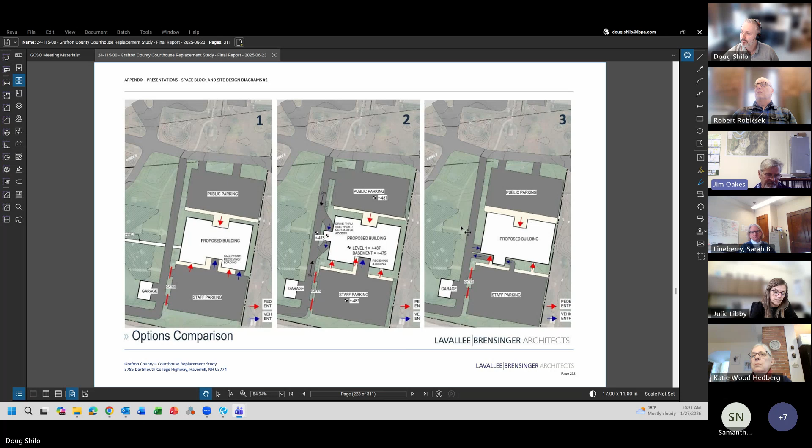Like a set of binoculars tuning in on what I think we need to do at this point is go back to where we were looking at the Sally port underneath, find out through the reductions that have come out in this latest round, see if maybe it's a wash on putting that back under. Hopefully it would be, and hopefully it'll just be the 3 to 4 deputies we're gonna have to hire long-term versus more bailiffs, which seem to be pretty tough to get.

Thoughts? Can I just say, I don't think that a tunnel or any kind of connection should even be a consideration. I just think given how much was spent on the J connector, which is just a hallway that doesn't run a very far span, the price for a tunnel would be kind of ridiculous.

So I think if you guys are able to figure out a way to put everything in the basement and just have the courts on the first floor, that would be the most ideal setup. Yeah, that's what we're talking about. So Bob's point was, okay, if we do all this exercise, most likely there's a possibility that the building cost might grow, but you might have enough offsets to where maybe the cost won't.

But he's also saying that when you go out and talk to the public, they're gonna have to understand that, because of these changes and the need for deputies long-term, you've just got to be able to explain the rationale for what we're following.

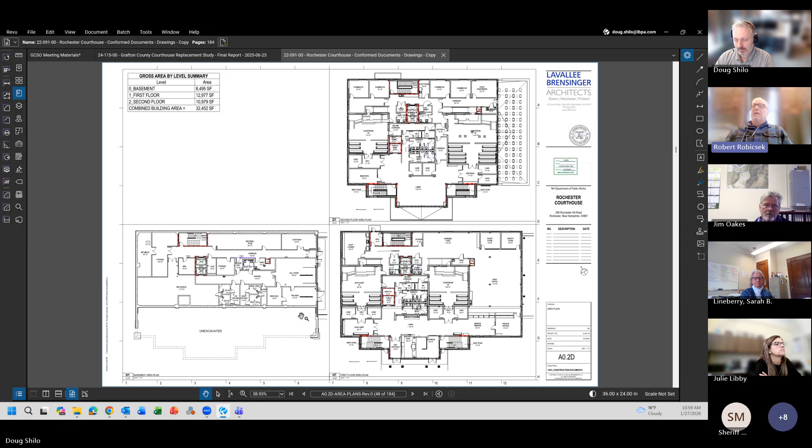So if this is the basement in that building, the Sallyport, they come in here, and then there's a control room with some holding cells and an elevator that leads up to the secure corridor. So this elevator right here leads to the secure corridor that comes up between the courtrooms, and that keeps it out of the pathways of the public and out of the pathways of the staff.

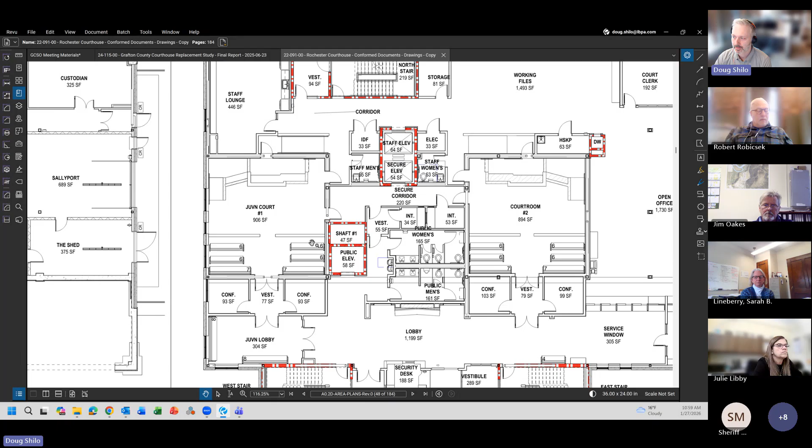I assume that's the only way to do this where the courts are on the first floor, right, and to maintain the separation of pathways that we know of, or the most reliable way, without getting into lockouts and things like that, which can cause a variety of issues, or adding more hallways, which is square footage and all that stuff.

So the difference here is I just want to make sure that as a result of this change, Chief, are you going to want, let's say, a control room with a person stationed here? We have it here because there are holding cells, but I would anticipate in the building for Grafton County, since you have holding cells between the courtrooms, that won't be necessary. But I want to make sure to confirm that.

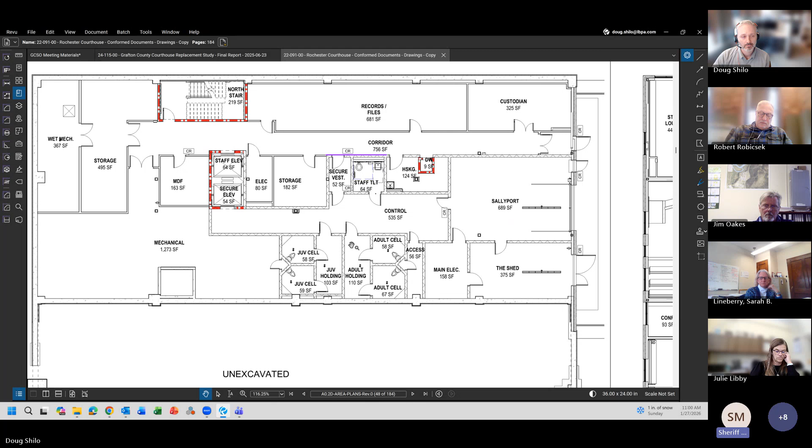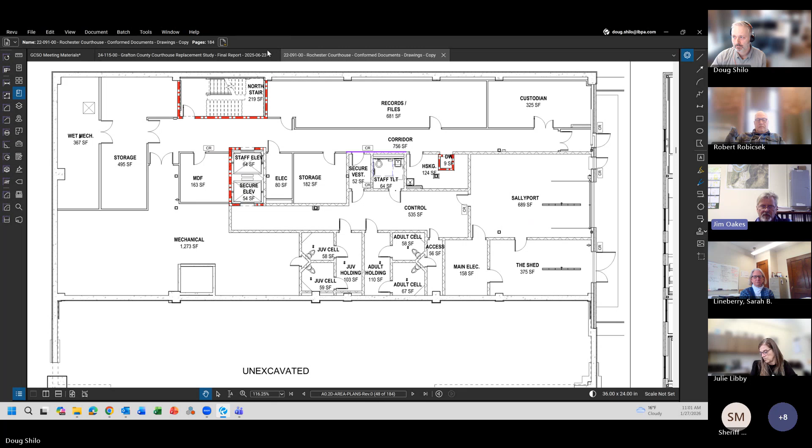I just have a question - did the courts come back with any downsizing, did they come back with any changes to size? Because that'll lead into my next question. I don't know if anyone has the answer to that. No, they did not - they felt like right out of the gate they had given kind of a bare bones, what they needed. It was equal to what they have now as far as square footage, and they have not provided any further reductions.

Okay, and then the second question would be, do the courts have to be connected? Because I know as they are right now, they are. However, does the district court need to be connected to the superior court? Because if not, then the Sallyport could just come into the back of the building, like the current design, with a secured hallway in the middle which then branches into one court or the next court.

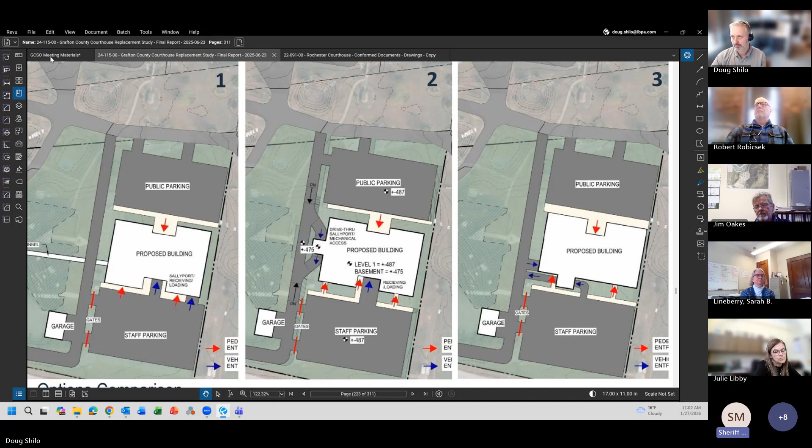I don't know if that would be an option, because if they don't need to be connected, then you could very easily split them up and it would save putting everything in the basement.

Hey Jim and Julie, I did want to speak to our space reductions because I have the numbers here and I want to reiterate what we've cut to date compared to the Danson report, which was between Circuit and Superior, it was 33,770. When we started out back in January of '25, we had already come to the table with a very reduced space plan in terms of getting it down to bare bones.

At that point our full program was 17,613, and with the efficiency factor it was 22,897. Then through the design process everyone was asked, hey, what else can we do? And we were able to reduce our space by another 1,351 square feet, which brings us down to, like you said Julie or Jim, just about where we are today with our current exclusive space. So I wanted to reiterate what we've done to date because we feel it's been pretty significant, and that we've really tried to play ball and make our space a very efficient plan.

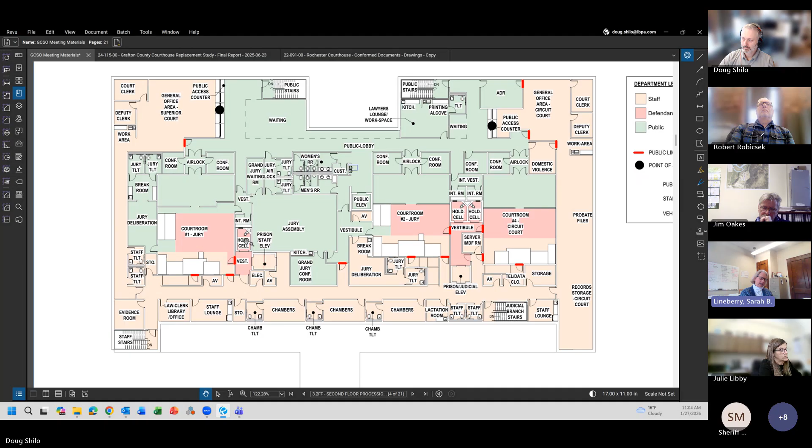Yeah, I'm not really sure without a visual, Sheriff, what you are conveying. We would have to see it, understand it, see what the impact is, and then play it back to the team. That's not something we could really make a decision on today without seeing it, understanding it, and getting proper feedback.

Okay, that's fine. I was just wondering if they have to be connected, the two courts.

So first, to confirm, Chief, could you confirm this is essentially what you're talking about? Could the Sally Port be here, and then a secure corridor leads to this courtroom, and then these two courtrooms connect to the secure corridor in this fashion, basically?

No, no, I'm just saying take where the Sally Port is and split the building right in half. You've got Circuit Court on one side and Superior Court on the other. You can still have the public entrance and all that on the other end. But I'm just saying, would it make more sense to go straight through the middle of the building and then branch out from there? That's where the Sally Port is, there's a secured hallway. And then, if the courts do need to commingle, they can use the public space up front.

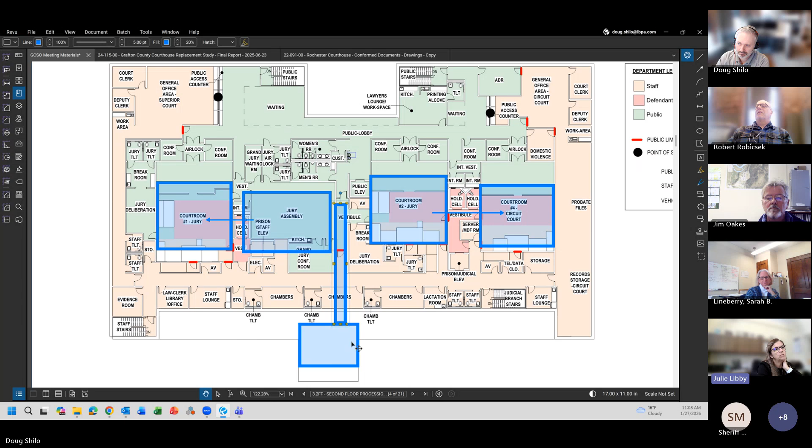We'll look and see maybe if they could stay on the ground level, but what are the pros and cons to putting the holding cells in the basement versus putting them directly on the first floor with the courts?

Right now we have them programmed to be with the court, like on the second floor with the courts. Is there any reason that it would make more sense if we're going to put the Sally Port in the basement, that the holding cells be in the basement as well?

Like Rochester is designed — Rochester does have the cell block in the lower level, but they also have the holding cells in between the courtrooms. Oh, okay. And so it really just be, and that is typically a need.

So you'd almost be duplicating in the cell block area. That's my opinion. The reason I asked, because I don't — just my ignorance and not knowing how that works.

Some of this can be determined by the length of time you anticipate a person will be in that holding cell. If there might be several people and you want to have one person monitoring them, that's the advantage. But if it's a limited time before their court appearance, I think this was done with the idea that really they're going to be in the jail until they're needed.

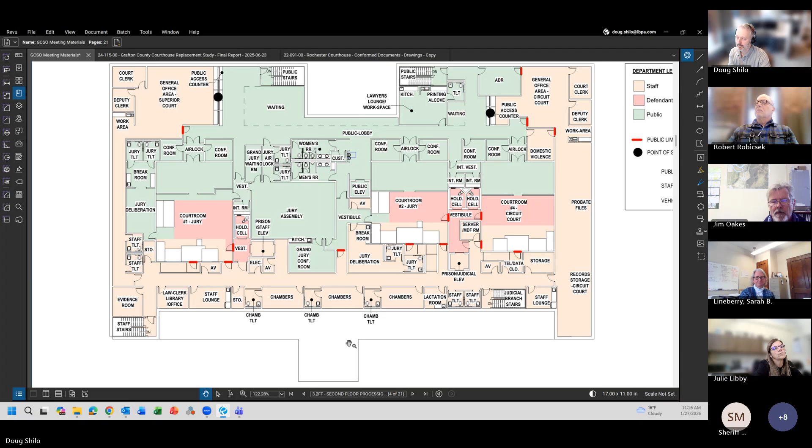Okay, so back to where we were, it sounds like to me that Lavallee, sounds like the direction would be to basically put things back in the basement again, try to establish the paths up to the first floor where the courts would be. Go through all the reductions and see where we land. Sounds good, yeah, makes sense.

I just want to clarify one thing, Jim, because maybe I'm the only one on this call confused about it. Is Deeds going to be moving to the new building, or are they staying in the current location? They're moving to the new building. That's what I thought, that's what I thought.

Yeah, I may have confused things there in the beginning. No, there's just been a number of times that we've advocated that the commissioners reconsider that, and 2 out of 3 are very determined that Deeds needs to be in the new building. Okay, I thought so, but just wanted to make sure, that's all.

Okay, so before I open anything up to the public, obviously Lavallee, you've got your direction on what you need to do. Julie and Jill, sounds like you're gonna put your heads together and figure out what the extra cost is for the extra deputies needed to support the new facility. Is there anything else that I'm missing?